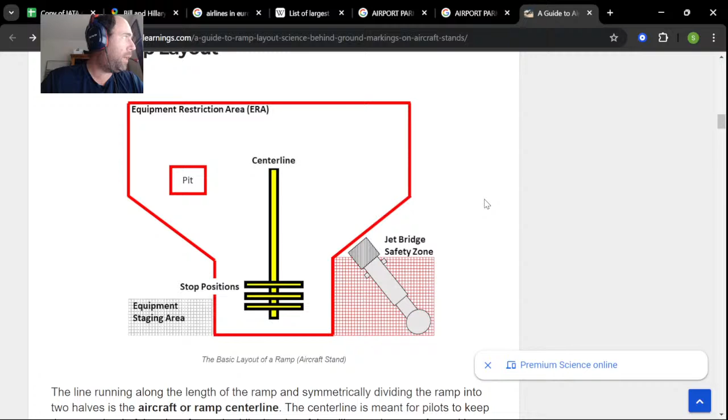So the question I've got is if the jet bridge is underpowered, why can't they attach a baggage ramp that aligns with the aircraft cargo door? Different aircraft have different configurations, so that cargo door might be slightly different from an ERJ 145 to an ERJ 175, and significantly different from a 737.

But the principle remains the same, because if a ground crew member could get in there and move that a smidge, that cuts down on overall emissions. And it allows the jet bridge to connect directly to the aircraft for safe, efficient transportation of baggage back into the terminal.

Meanwhile, that can cut down on workers' safety incidents related to chronic lower back pain, back spasms, and the lifting of oversized cargo, improving the health and well-being of the ground crews. It can also help eliminate and reduce damage to bags and cargo.

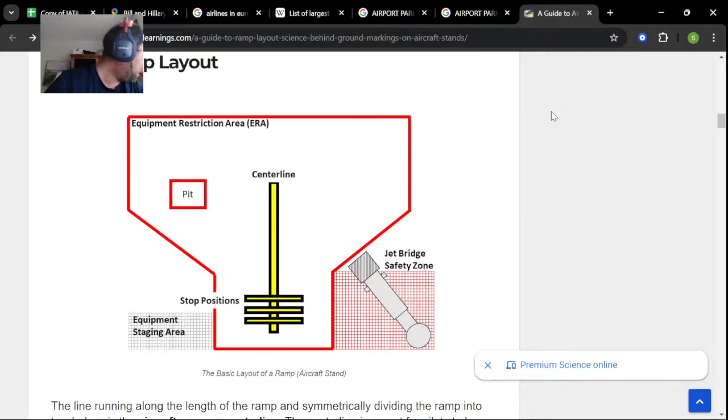Because let's face it, people do dumb things like pack their laptops in their checked bags. If you've ever done that, you learned your lesson, I'm sure. Don't do it. So what we're looking at here is the basic ramp layout.

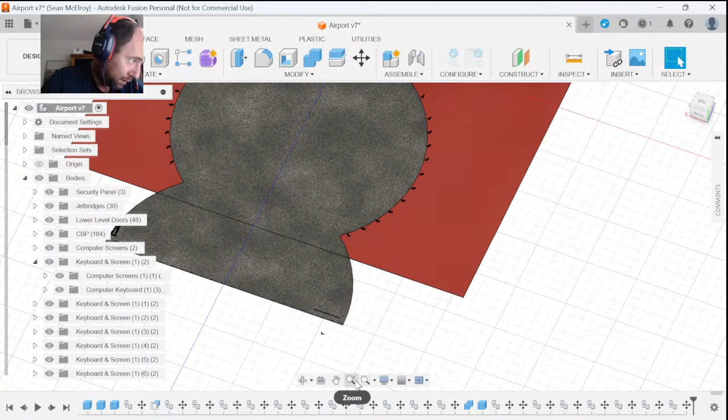This is obviously the center line. You've got your various stop positions for the various aircraft types. We're going to zoom in to Foxtrot 30 here on our airport and work with Foxtrot 30 to start. Foxtrot 30 is equipped to handle 737s, all the way down to 320s, and even Embraers.

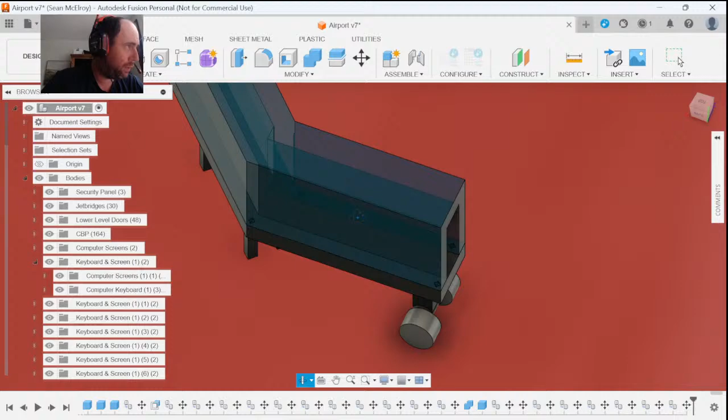You see here we've got the original crude layout from when I first started fucking around with this. We are going to be modifying this significantly during this process.

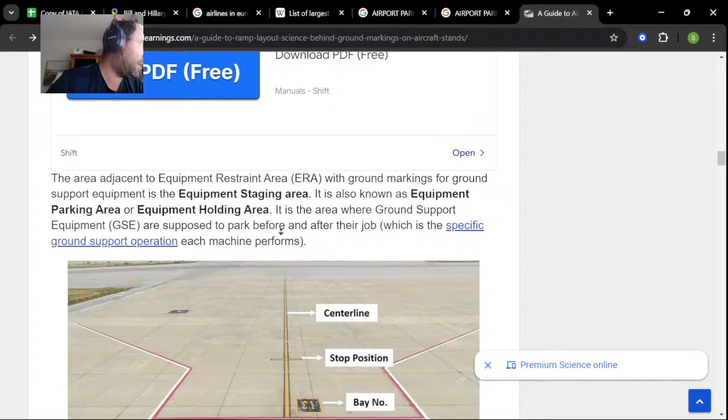This guide I found to be very useful, it's modestly technical. The area adjacent to the equipment restraint area with ground markings for ground support equipment is the equipment staging area, also known as the equipment parking area or equipment holding area. It's where ground support equipment is supposed to park before and after their job.

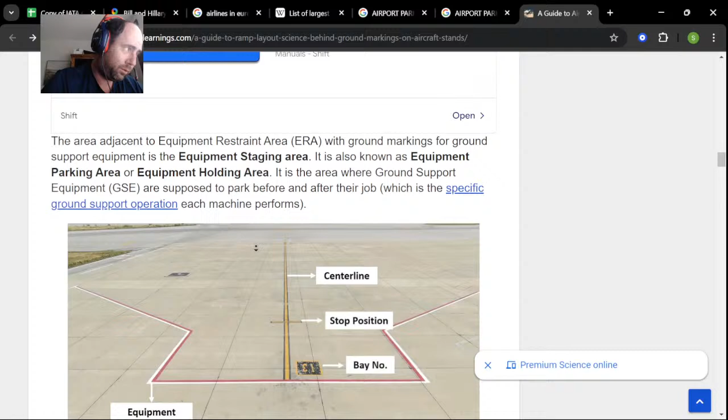So this is beyond these white lines here, these white-red lines. The reason these are so broad is because these are the actual blast zones, essentially, from the aircraft.

As you can see, the stop position is where the front set of wheels is going to stop on the ground. I'm not sure if you've ever seen the front of a cockpit.

The reason the pilot knows to stop is you see the guys with the little glowing orange wands. Those are the ground crews, and they're guiding that pilot the entire time. There are three, one on either wing, and then one directly in front of the pilot. That way the pilot can see from all views what exactly he needs to do with the aircraft to make sure it's safe for everybody involved and that the aircraft gets out safely.

Now, meanwhile, they do also have jet bridge safety zones, because those jet bridges do move. We see that here in this image, because this jet bridge can shimmy and rotate as it needs to, depending on the length of the aircraft.

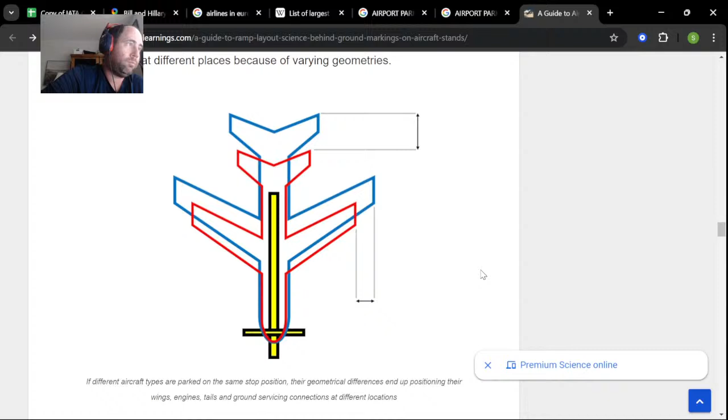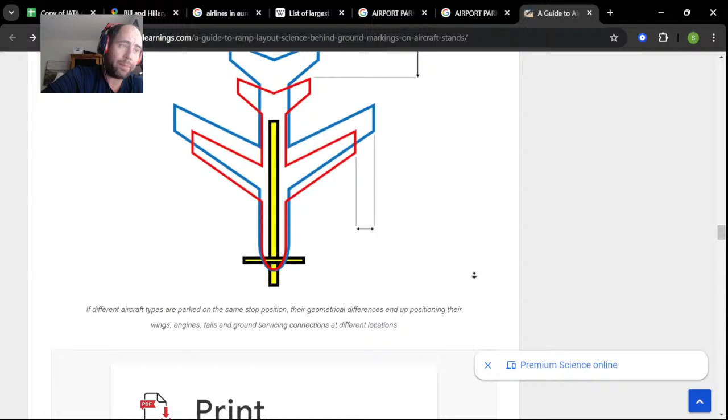As you can see from this image, as long as that center line's stopping, as long as each of these planes is stopping right there on that stop line, it's hitting perfectly.

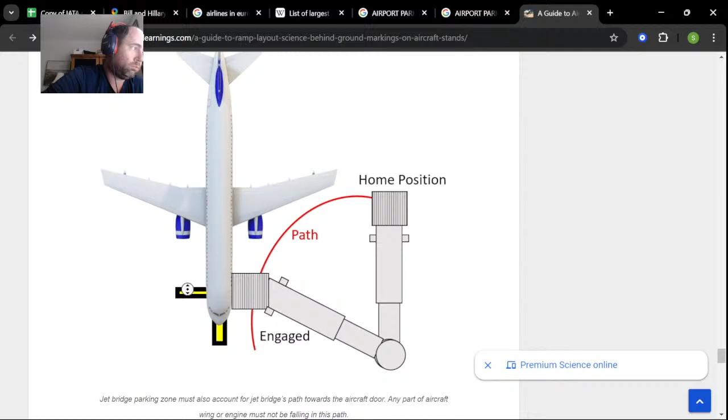Now what you're seeing here is how that jet bridge moves. It doesn't just move, it rotates, on a singular axis, that axis point being right here. As it rotates, this section here does not move. This right side is actually where you'll wind up boarding from. What rotates here is the head and that extension.

Looks like we need a little bit more data here.

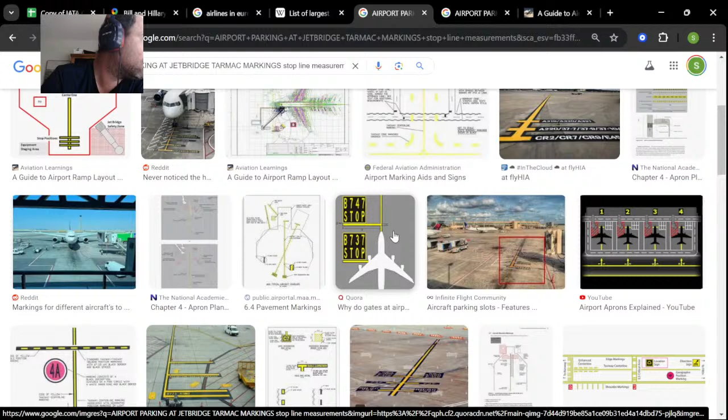This one in? No. Let's see what this has to say about this. Oh, okay.

This is surrounding the paint that has to be used at the airport. We're not doing any of that.